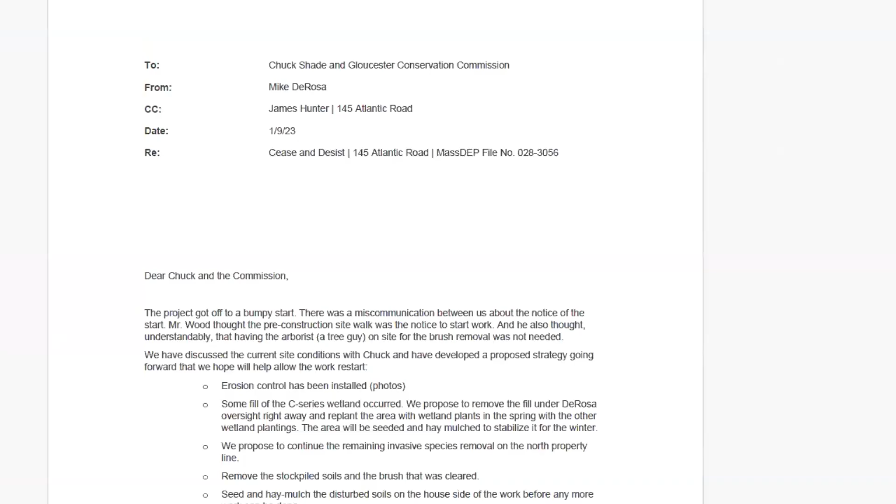Technology is just not going my way. Can everyone see this at this point? Yes, we can see it. Okay.

So we're off to a bumpy start. There was miscommunication or misunderstanding. Mr. Wood thought that the pre-construction site walk was his notice to us that he was going to start soon. It was our understanding, and I think Chuck's understanding, that we were going to get a phone call a couple days before he actually brought machines to the site and did the work. So communication was not 100% there.

And then understandably, he thought the arborist, Mark Cicoria, wasn't needed until the tree work was actually happening, not for the brush removal. So that was his misunderstanding on that. But we've complied with the cease and desist. I've got photos that I can show you, which I'll run through.

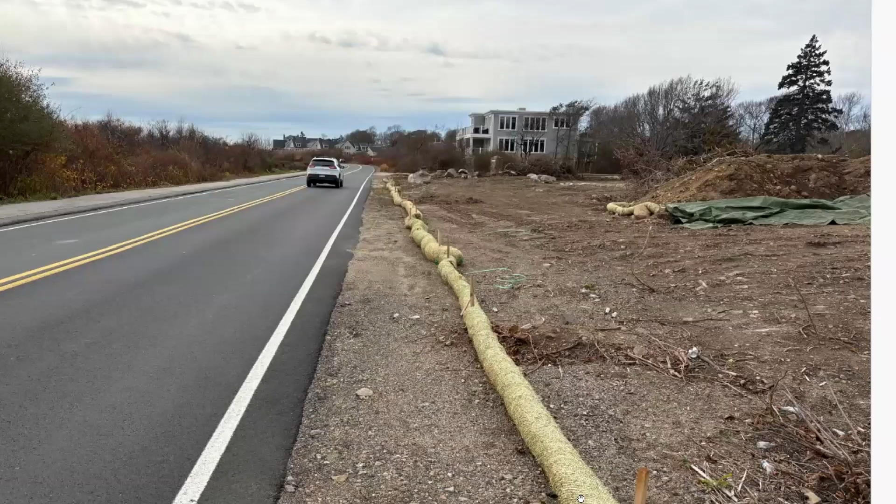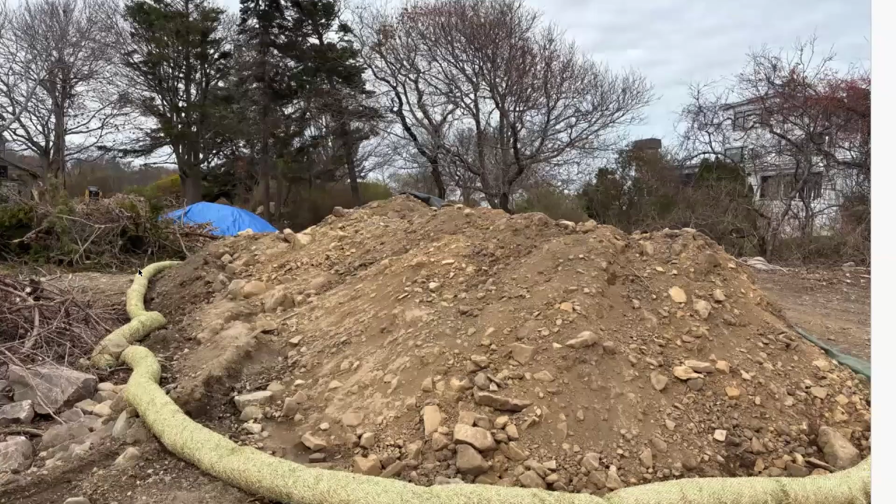These were from today. The erosion control has been extended, so all the disturbed soil has been identified there. It's a flat area, so I'm not too concerned about runoff at this point. They did have erosion control put around the stockpile of soil. This stockpile is proposed to be removed. This was from the grading up near the pool portion of the project. So this is slated to be removed from the site.

And this is the area that Chuck and I are concerned about. This is the area of wetland C. And when the operator was grading out this area, he graded over wetland C. So we've got probably between 4 inches and a foot of fill over wetland C. This is wetland C here. So that photo was looking down from the north towards wetland C, and the grading is right up against the road there.

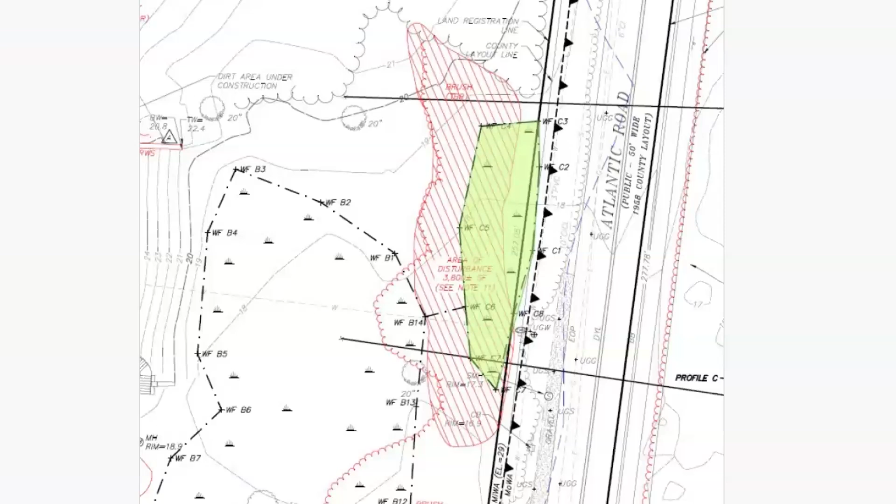So that needs to be taken out. And we'll get to that in a second, but we obviously have to restore that, and we have to restore the connection to wetland B as well. This you can see, this is where wetland C is. This is where the hydraulic connection between the two wetlands is. No real damage at all really to wetland B, so that's good.

They did line up some boulders here. They were not aware of wetland C, so they lined the boulders up around the perimeter of wetland B to protect it. And they were gonna just grade this out and seed it. There is an upland area between the two, and there's a swale that connects these two wetlands, so that needs to all be restored. I don't see any damage from the stones and the boulders being there, but up to the discretion of the commission, they weren't on the plan. So that is an item we should discuss.

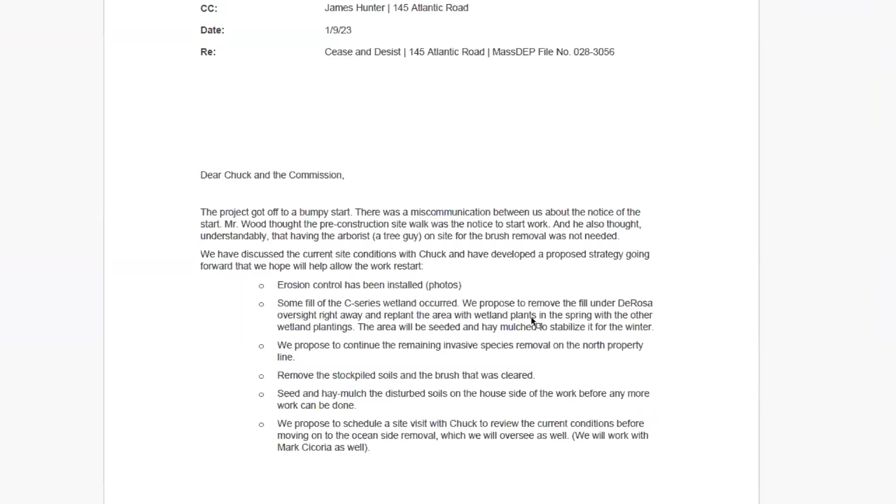There's also some additional invasives, Asiatic bittersweet, privet, Japanese barberry and Japanese knotweed, that all need to continue to be taken out on the north. We have plantings going in here, trees and such. So what I wanted to propose to the commission is that erosion control has been in. We've got to remove the fill in wetland C and reestablish those contours. We'll seed and we'll hay mulch that for the winter and keep it stabilized for the winter.

We'd like to continue with the invasive removal on the north side of that property while the machine is there. We'd like to remove the stockpile and the brush that's on site, that was scheduled to be removed. And then seed and hay mulch all the disturbed soils on the house side of Atlantic Road before we do any more work. Once the north side of the road gets all stabilized, I would propose that we set up a site visit with Chuck to review that, make sure he's happy with that work.

We will do all the oversight along with Mark Cicoria from Cicoria Tree. So we will be very involved from here on out to make sure that things are done right. Mr. Wood knows that, and he knows that we'd be involved. And then once things get all stabilized, we would then ask to go back and continue with the work across the street and continue the removal of the invasives there.

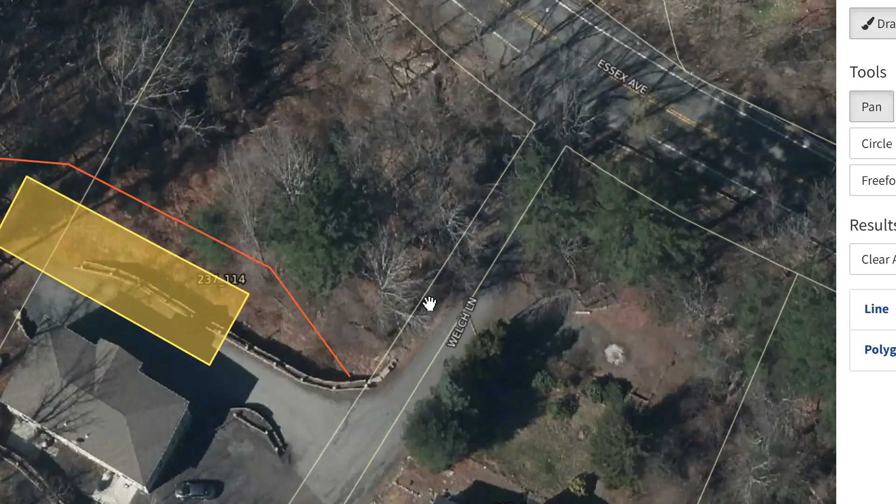And then the other piece of update is that we went and had Bill Manuel, who did the original delineations -- you know, there's an active ORAD on this, but it's active due to extensions granted by this commission and extensions granted by the acts of legislature -- so Weston & Sampson said, although while it's active, we'd like you to please go back and make sure that things haven't changed radically in the 8 years since it was first delineated.

So Bill Manuel went back out there and we'll be submitting, along with the updated plans, a letter from him dated October 31st, in which he points out virtually all the flag boundaries are controlled by either Essex Avenue or occur along the base of the sloping topography. He says, after walking the wetland boundary, I concur the wetland flags remain accurate to define the wetland resource area.

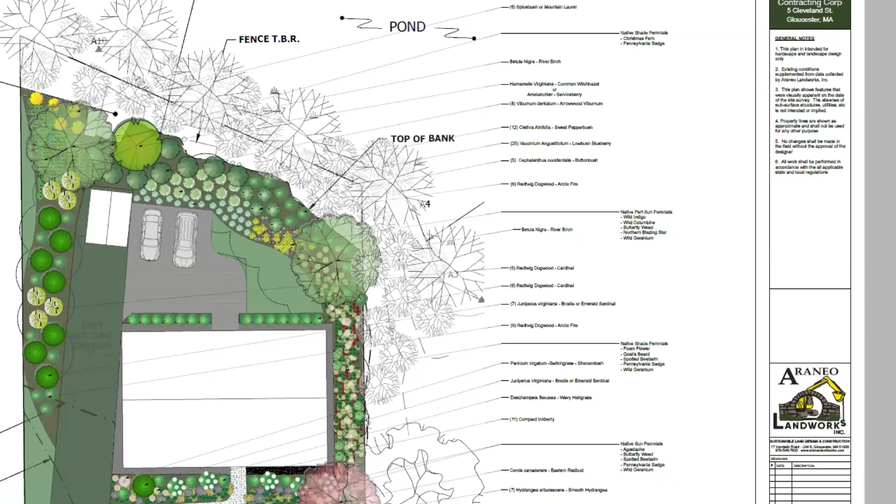Thank you, Chuck. So you're referring to this area back here? Yeah, right. We don't have anything specifically proposed there because we had enough planting to accommodate the required amount in this area, but there's no harm—we're going to be removing this, and there's asphalt here and here, so you're right, this does need to be planted.

So perhaps, if the commission's comfortable, as a condition of the order, the area toward the northern part of the lot where the asphalt's removed needs to be planted with native species as well. I think we'd be fine with that. It would be great.

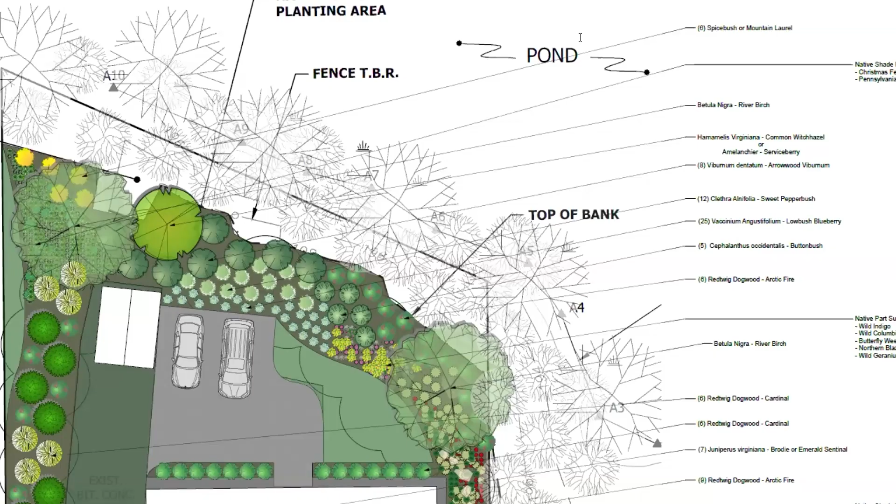Commissioner Chuck, did you have any additional comments? No, I think that's good because that's also kind of a steep slope beyond that, so it'd be good to have that stabilized. Commissioner Jackson moves to close the public hearing for NOI 0823094 at 11 Apple Street.

Commissioner Cook seconds. Member Cook, yes. Sergeant, yes. Member Terry, yes. And Member Jackson, yes. Commissioner Jackson moves to approve NOI

020823094 at 11 Apple Street with the aforementioned condition. Commissioner Cook seconds. Member Cook, yes. Yes. Member Terry, yes. And Member Jackson, yes. Wonderful. Commissioners, thanks for your time tonight. Thank you.

On the next item, NOI 0283095 at 6 Brewster's Lane and 13 High Rock Terrace, Lisa Latoff Perlo, the applicant. This is to raise and rebuild a dwelling in regards to the Coastal Bank.

John Judd from Gateway Consultants, representing. Thank you, Mr. Chairman, members of the commission. For the record, John Judd, engineer with Gateway Consultants, representing the applicant for this property.

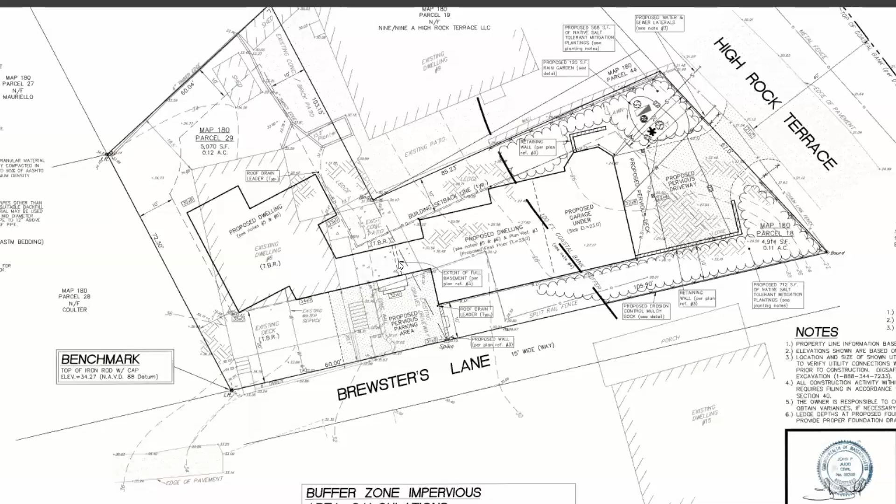What I can do is share my drawing showing the latest site plan that was submitted. At our last hearing, there were some questions regarding the area of the rain garden and the soil conditions there. We subsequently went out and did a soil test pit, got down to over 40 inches deep, showing the test pit log—there was pretty good sandy material there.

There was also some reduction in the footprint that the architect gave us, so that's been incorporated into what you see here. There is a pervious driveway proposed coming off here, but we are providing the requisite mitigation planting for the buffer zone.

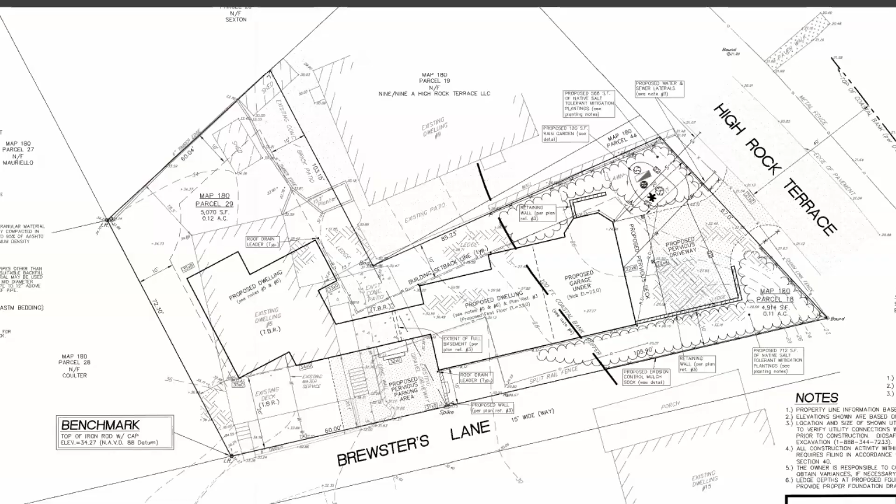Those calculations are shown here. We're doing 200% of the 640 square feet in the buffer zone of the proposed impervious area here. So this is all proposed to be native mitigation planting here. There is outcropping of ledge here.

And at the last hearing, there was some back and forth as far as ledge removal. I'm confident that ledge removal is going to be needed. However, the applicant has indicated they're using a new technology, the Dexpan expanding grout, which eliminates the need for any blasting. So we accept a condition for no blasting on the property.

And what they do is they drill these holes closer together and they put it in with this expanding grout, Dexpan. And apparently it's been used extensively in other communities where blasting is just not possible. So I'm curious to see how that works, but they've accepted that should the commission decide to prohibit any kind of blasting, they'll accept that condition.

Again, we're in a buffer zone notice of intent here, and we are providing 200% mitigation planting, and we did add the test pit for the rain garden. Obviously, everything gets approved through the city engineer during the building permit process for drainage. So I can answer any questions you might have at this time.

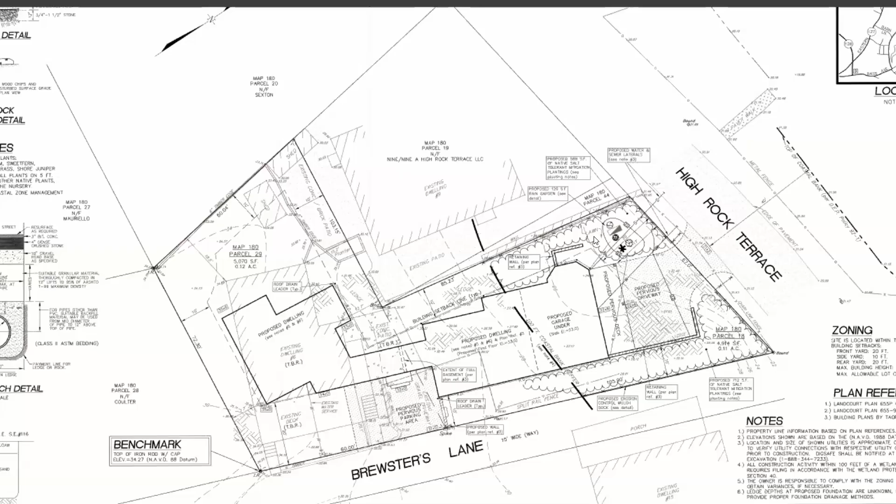Thank you. We'll open up to public comment. Any members of the public who wish to comment on this project, please raise your hand. We have one hand up on the Zoom, Sean McCormick.

Thank you. Good evening. It's Sean McCormick of Davis, Malm & D'Agostine. I am here representing the abutters on basically either side. It's 9 High Rock, 9A High Rock, and 15 High Rock.

But I guess my first question is really the resource area here is bank, and I've been through the filings so far, and I'm just sort of struggling to understand how we can evaluate the increased impervious area that's going to flow towards the bank, and I'm not seeing anything akin to a stormwater report or any kind of stormwater numbers or drainage calculations. And so, I think my clients are justifiably concerned about the health of the bank that either abuts their property or that comprises a portion of their property.

Well, I'll share. Let's see, this one. Share. Can you see it or can you see my whole screen? This is it, I guess. There we go. Yes, can you see it? I can't see what you can see, unfortunately. Okay. Yeah, we see it. So underneath my plan is the original approved plan.

And what happened on this site is that because that driveway was very, very steep going straight up, if you can see the gray underneath, it was decided to make it a little safer and to realign it and to curve it so that it's not such a steep, crazy slope going up. And that's one thing that happened. And then also to support some of the grading, there's a boulder wall down along the street line.

The very first thing is the proposed planting on the approved plan called for something like 74 2-inch caliper trees, and there's absolutely no way. I don't know how you could put those on that amount of space within this, which represents the jurisdictional area, the 200-foot riverfront zone. And so they asked me to come up with another plan that is more feasible.

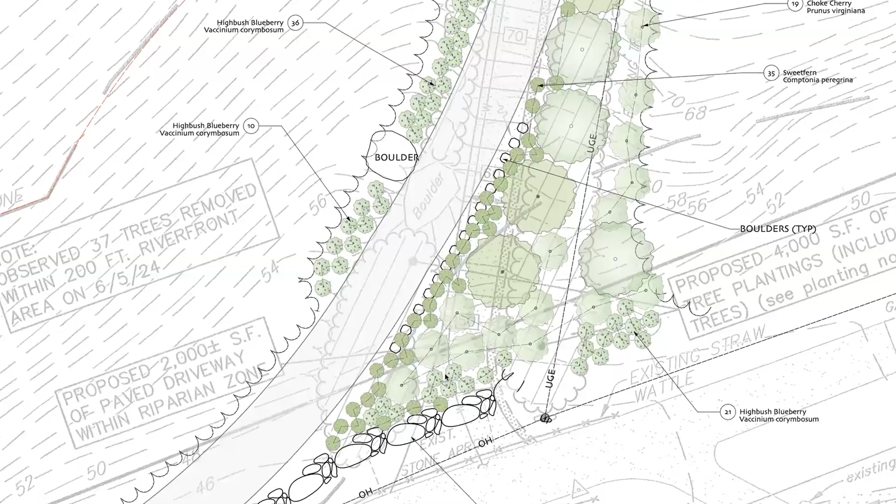The other thing I forgot to mention is that there is an overhead wire along the street down here. And so I was trying to keep tall plantings away from that overhead wire so that didn't create problems down the road. And there's also a power line that connects from this utility pole here up to a well, that's the location of the well where it was as built. So, do you have questions?

Okay, thank you. We're gonna open it up to public comments now. Any members of the public who wish to comment on this project, please raise your hands. We have no hands up on the Zoom and none here in person. And just to remind the commissioners, this is not an NOI hearing. This is to determine if the commission's okay with this planting plan under the current order of conditions, or if they feel there should be an amendment or some other plan to go forward with this.

Okay, we'll do commissioner comments now. We'll go through all the commissioners and then you will have a chance to respond. Member Cook, you're muted. Yeah, and I know you said it's not part of the NOI, but I think they go hand in hand here. The plan from March 27th, I believe it is, we show a deep swale over on the side to capture rainwater and all of that. I almost think we need to go back and approve the road changes that go into some of the resource area, and then go back and look at the plan for the plantings.

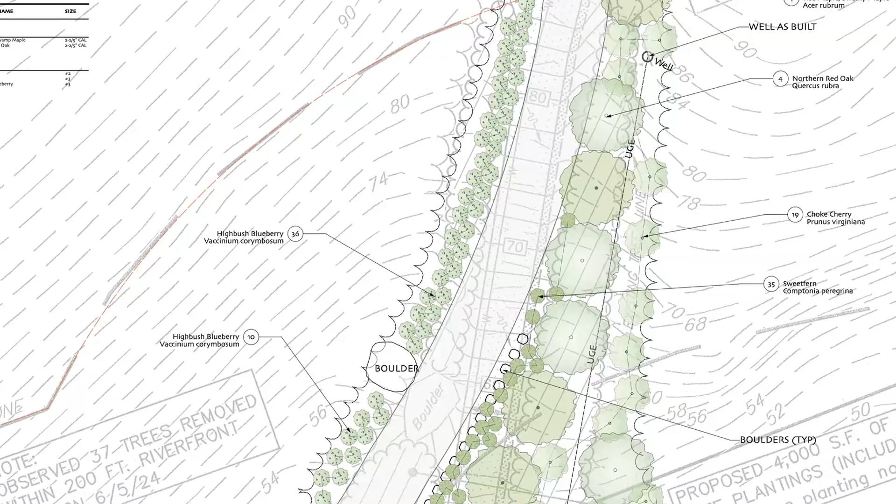Okay. Do we have any other information we need from her, or do we just need to figure it out? I think it still needs to be an amendment. If you can show that. Do we want to take a vote? I'm doing an amendment. I'd like to hear if Chuck has any additional comments. Yeah, Chuck, any comments?

Yeah, I mean, I understand the concern with the discrepancy of 74 trees, now 8. But I also understand the constraints there. I do think there is value in planting other strata of vegetation out there rather than just trees, as was originally proposed on the order of conditions. So maybe there's a happy medium of additional trees, but also having these other strata in there.

I think some of the concern too, typically the 2-to-1 is assuming that all those trees, though they might make it the first 2 years, they're not going to make it to maturity. And I think the current proposed plan is assuming all those trees are going to make it to maturity and fill out. So maybe with that understanding, there can be additional trees planted so that when it achieves maturity, you have that canopy cover. But it sounds like there's interest in having this come back as an amendment.

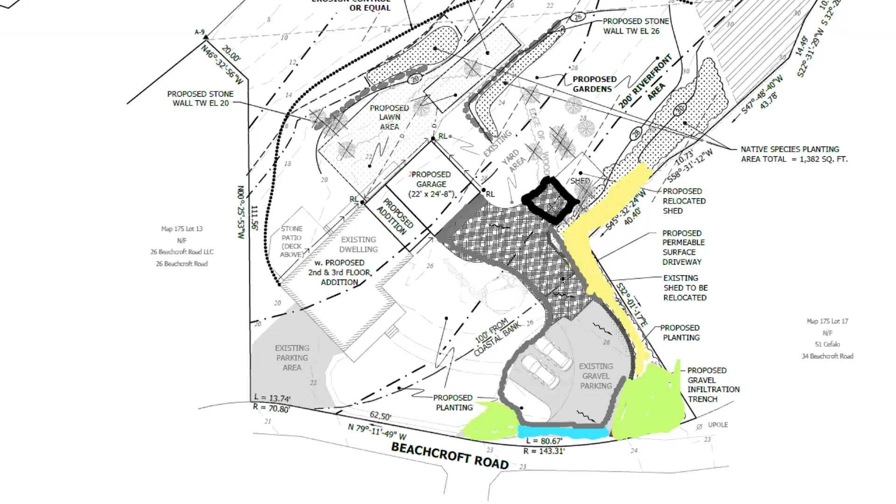And the intent is to capture water from the driveway? Yes. It's that dark gray line that's the infiltration, on the edge of that pavement. That's still gonna be done? Yes. Okay.

Okay, and Member Jackson, you've had this project come in before with an NOI, which has gone forward. I guess I also support the project.

I guess my only question is, all of the planting you're doing, is some of it in addition to what the previous NOI requested, so that you're mitigating for the new impervious surface? We haven't stated that, but we will be putting a lot of plants on the property. Even though we're planting the additional trees and shrubbery as requested, we intend to add more plants throughout the property, more so for pollinating and for the wildlife around there. I'd like to see more of that.

You're good with this, Chuck? Yeah, it's actually a decrease in the overall footprint because they're moving that shed. Okay, so the footprint of the disturbance was already approved. By moving that shed to where the blue square is now, they're decreasing the overall footprint of that driveway. It's just a matter of making it impervious versus pervious. I think as long as it's capturing that runoff adequately, I'm good with it.

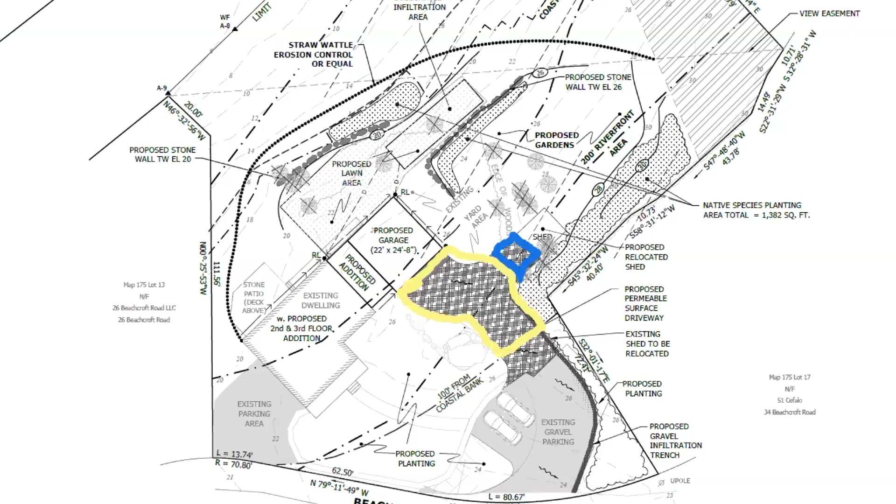Commissioner Jackson moves to close the public hearing for NOI 0283002 -- no, and Commissioner Jackson moves to close the public hearing for RDA 1839 at 28 Beechcroft Road.

Commissioner Cook seconds. Roll call: Member Cook, yes. Sargent, yes. Member Terry, yes. Member Jackson, yes. Commissioner Jackson moves for a negative determination for RDA 1839 at 28 Beachcroft Road, as described.

Commissioner Cook seconds. Roll call: Member Cook, yes. Member Terry, yes. Member Jackson, yes. Okay, thank you very much.

Thank you. Good luck. Thank you.

Okay, moving to the next item of new business: NOI 0283098 at 50 Essex Avenue, City of Gloucester DPW is the applicant. This is for the addition of a secondary treatment system to the existing water pollution control facility, within the flowage and buffer zone areas.

Lisa Gloucester from Tetra Tech -- yeah, I might start off. Good evening, members of the commission, my name is Bob Parsons, I'm a project manager at Tetra Tech. I'm joined by Tom Keefe, who's a design manager at Tetra Tech. We also have Lisa and Sean Foster from Tetra Tech presenting virtually. We wanted to be here just in case, and we brought some plans as well, easier for the members to see. Eric Kelly is also attending virtually from Apex Companies -- there's a lot of history on this site, so we have the right folks on. I believe Siobhan Callahan may also be virtually present; she's an engineer with the City of Gloucester. Is Siobhan on here yet? Maybe Dana -- is Dana on there by chance? Okay, she is.

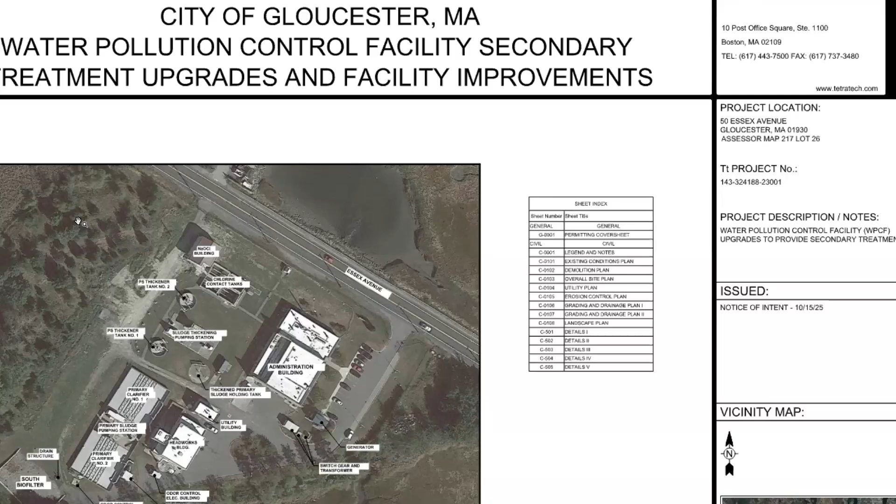What's interesting is when we were doing research for this project, looking at permits filed back in the 70s when the original plant was constructed and permitted, the secondary treatment was actually shown on this portion of the site. So it appears it was always intended for the site to have a full build-out with secondary treatment.

So we zoom in a little bit here to an aerial photo. The red represents the entire parcel that the city owns. The blue color represents the flood barrier berm that was constructed. So all the work will be taking place within the flood barrier wall and berm.

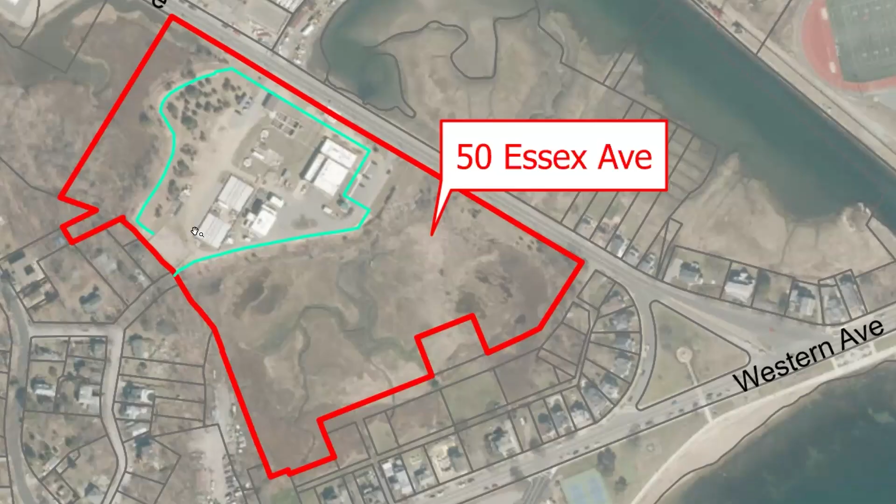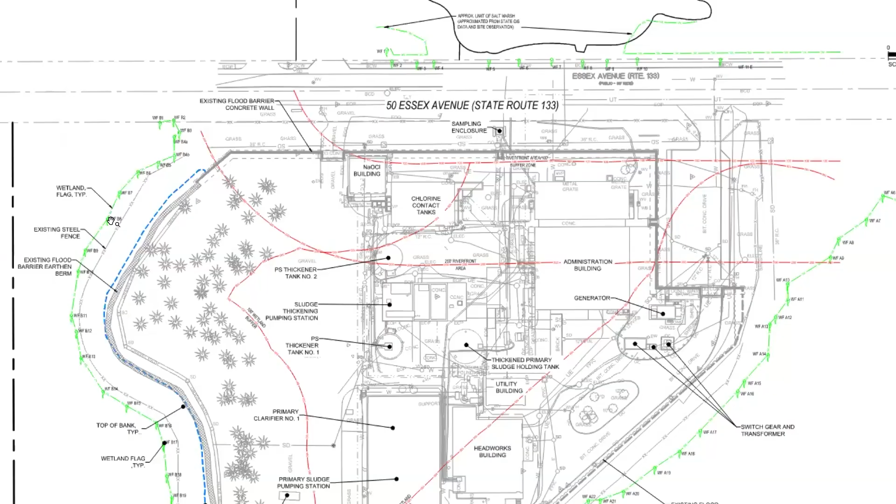So if we go to the existing conditions plan for a second, we have wetlands exterior to the flood berm and flood wall on either side, on the east and west sides. We also have wetlands across Essex Avenue. So we have a 100-foot buffer zone from each of those series of wetlands cast onto the project site. This is the wetland limit in green, and here's the buffer zone all the way around to here.

What I'll point out is there is a perennial tributary across Essex associated with the Annisquam that does project a 200-foot riverfront area onto the site. However, there are provisions in the Wetlands Protection Act that for sewer treatment facilities and plants, expansions or new, the performance standards for riverfront area don't have to be abided by. Those are relaxed.

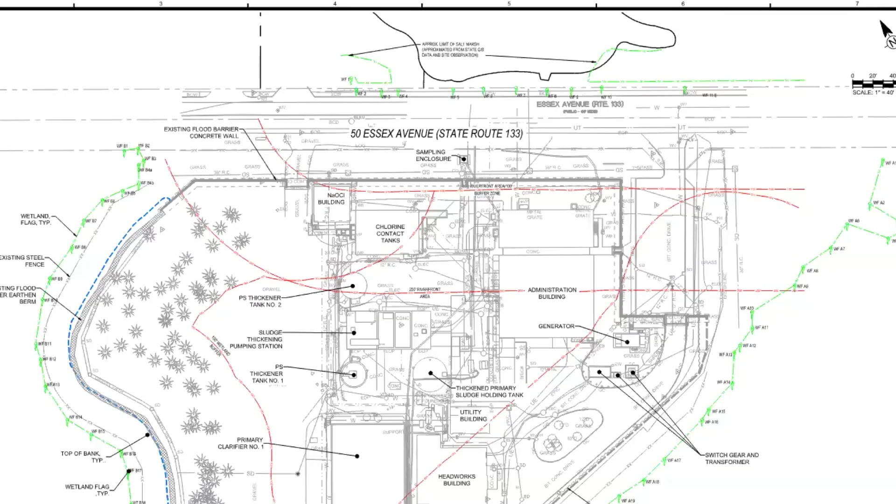So if we look at the site, we also have a number of trees that you saw in the aerial photo. We did a tree inventory, and there are approximately 33 trees that will have to be removed in that area to facilitate construction.

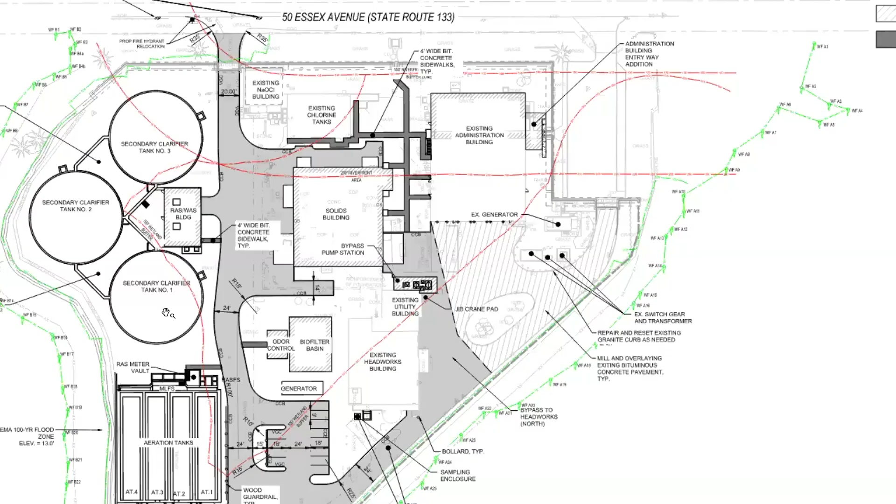So if we look at this site layout, I can tell you it's extremely tight. Almost every square foot of this site is going to be occupied by a project component. So we have these clarifier tanks, and just to give you a scale for an order of magnitude, these are 90 feet in diameter each. These are very large tanks. We also have aeration tanks in the buffer zone, and a building.

We'll be improving the emergency access in the back. We have additional parking spaces, and the gray represents the addition of pavement. Right now, the majority of this is gravel, and that will tie into the existing pavement that's there today.

So two things I want to mention. One is we recognize that trees are part of your ordinance. We'll be removing 33 trees, and we were hoping to have a meaningful location for where to put those trees, because there's no space on this project site. There's really no room to put them. So we were hoping to work with the commission and perhaps the tree warden to come up with a meaningful location, maybe somewhere else in the city that the commission owns a property or owns a park that they want to see enhanced. But we're really pressed for space on this site for the trees.

And we would respectfully request a condition that we appear before you with a tree replacement plan for review and approval prior to the issuance of the certificate of compliance.

The other component, an administrative ask if you will, is the construction is expected to start in 2026 and will go on for between 4 and 5 years. So there is a provision in the Wetlands Protection Act that allows the commission to issue a 5-year order, and we would respectfully request that you entertain that request of a 5-year order.

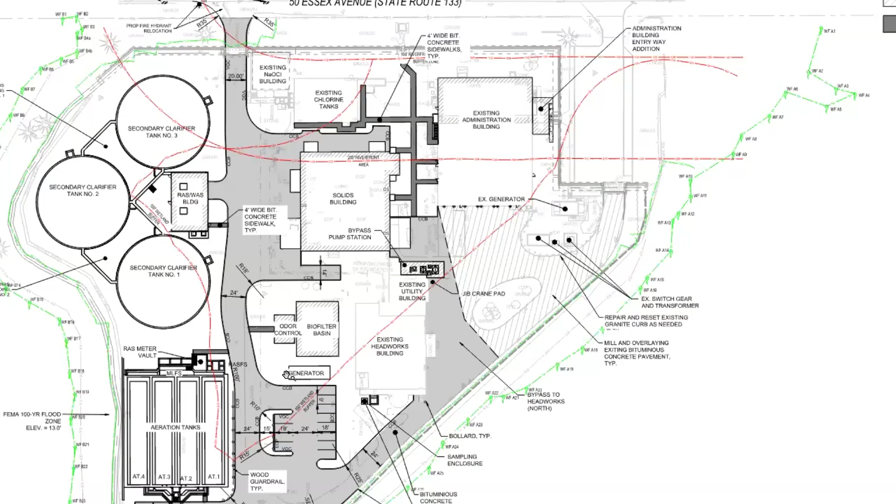As part of the previous flood mitigation project, there was an emergency access way installed on the south side of the project facility. We're proposing to install pervious pavers to connect the paved driveway to that emergency access. The existing access, which is primarily gravel, we're going to maintain as is, size and slope, but we are proposing some stabilization measures to add to the steeper portion of the slope.

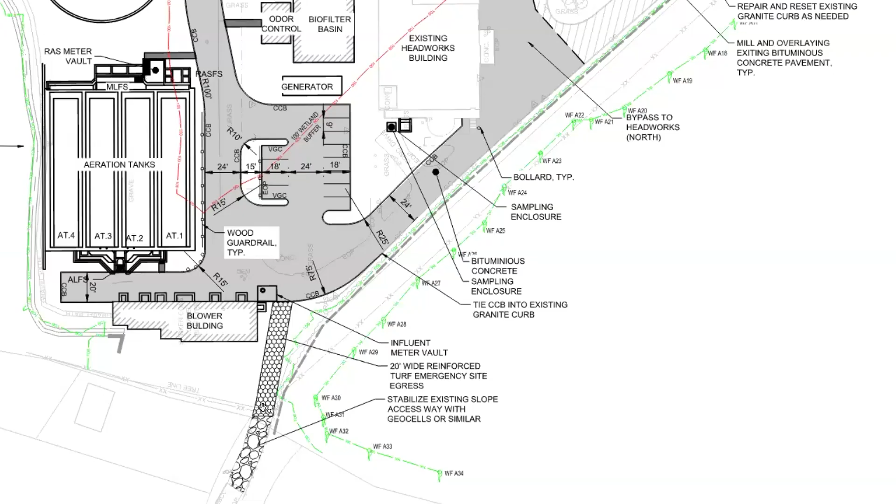The existing site is fairly flat, generally 1 to 2% slopes. Aside from the deep excavations required for the structure foundations, some site grading will be required for stormwater management purposes. In regards to stormwater management, the project has been designed in accordance with the Mass DEP Stormwater Handbook. It is considered a new development because we are increasing impervious area.

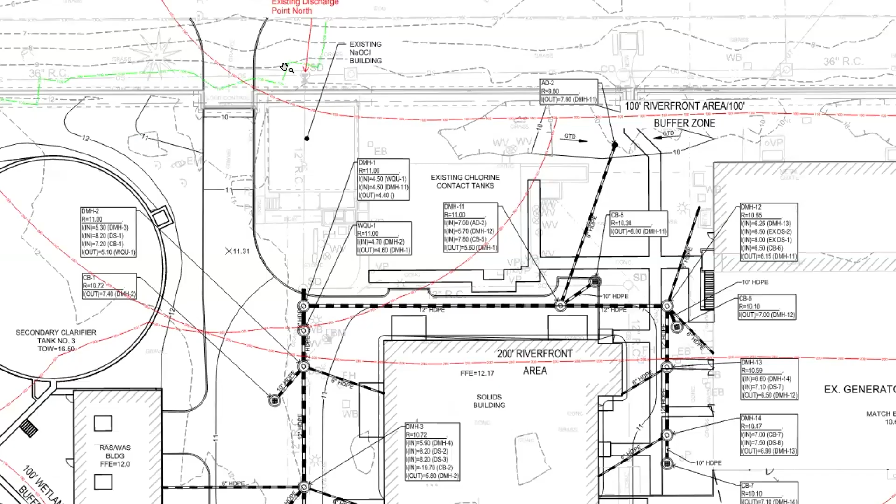Currently, the site has 3 existing stormwater discharges from the project area: one to the north, one to the east, and then one to the southwest.

We're not proposing any new discharges. We're not even going to modify or upsize what these are. We're just going to connect to them and utilize them as they are today.

Our geotechnical subconsultant did a pretty rigorous subsurface investigation, which included test pits, borings, monitoring wells, and infiltration testing. Based on those results, it's mostly a fill condition, and the soil hydrologic group is a C, with seasonal high groundwater around 3 to 5 feet below ground surface.

Depending on where you are on the site, due to the nature of the facility operations, numerous subsurface proposed utilities, and the somewhat high groundwater and soil conditions, infiltration or recharge is only provided to the maximum extent practicable. That is allowed for C soils under the Stormwater Handbook.

For water quality, primarily paved areas and other impervious areas will be captured by catch basins with deep sumps and then directed through a particle separator to provide 80% TSS removal.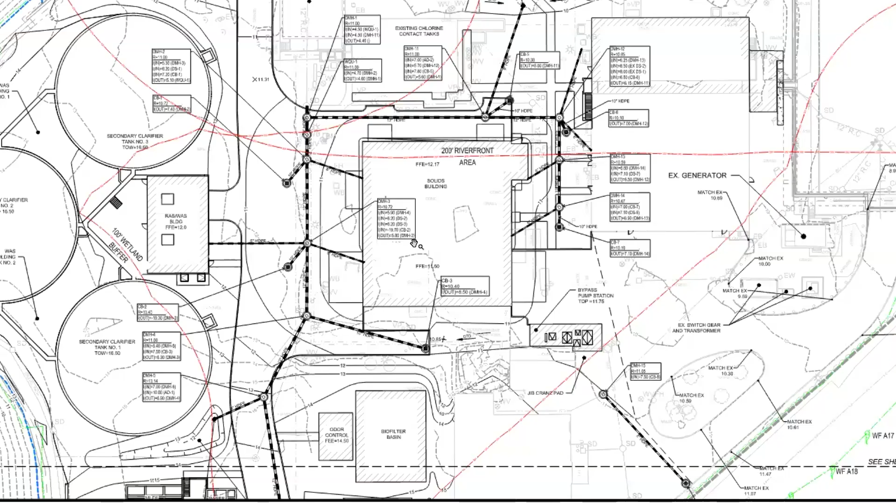One little tidbit to this project is the existing headworks building receives offsite wastewater from offsite septic haulers, and they connect to discharge their load into the treatment train.

These pollutants are discharged directly into the process, but there's a remote chance that some of those pollutants could come in contact with stormwater flow from a rainfall event. Any area where they're loading or unloading is going to be completely segregated from the stormwater flow.

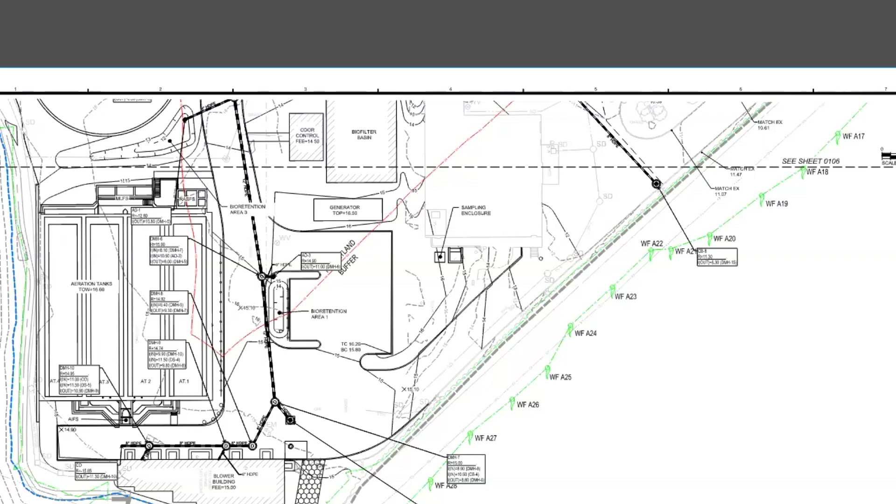What I mean by that is it will be graded and captured by its own catch basin and directed back into the pumping system to be collected and treated as part of wastewater. Again, just a mitigation measure to eliminate any chance of that happening.

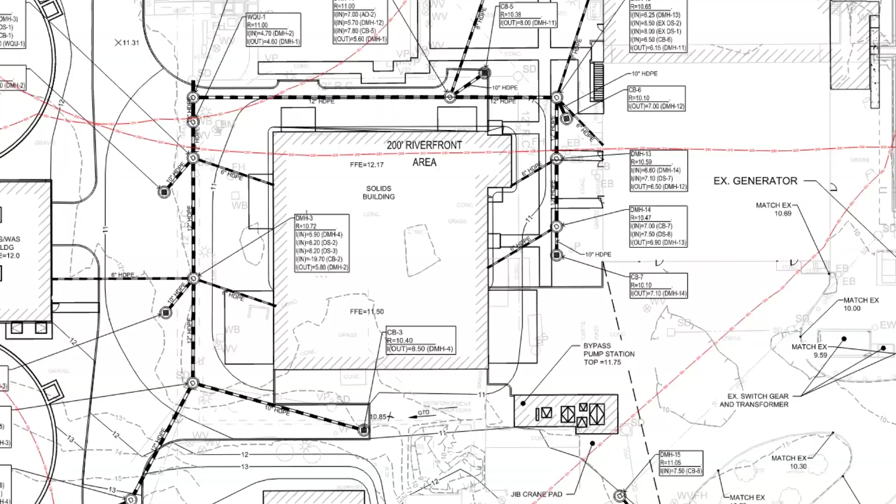That kind of wraps up my piece of the presentation. I'll turn it over to the commission if they have any questions or would like to discuss anything more.

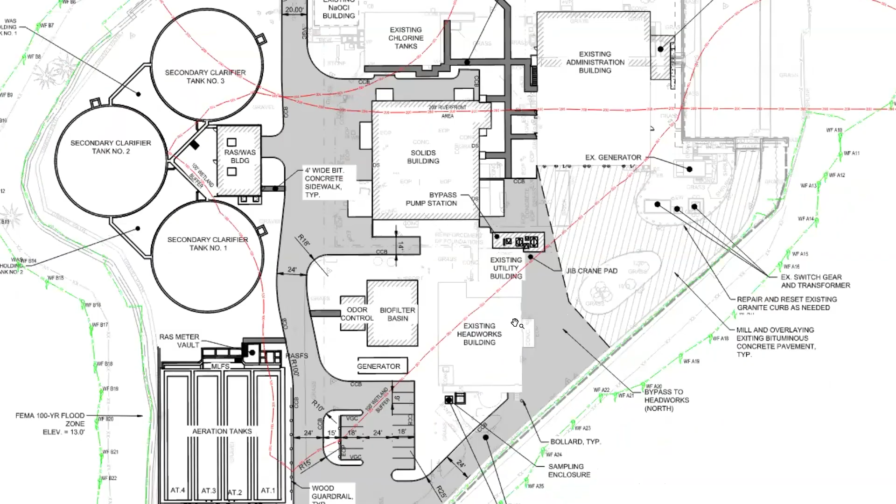The second question was in regards to the septic deliveries, right? So right now the Headworks building, and Lisa, I don't know if you could bring that up again. They deliver on the east side of the facility, and they just have usually a hose that connects to the back of the truck, and that kind of dumps right into the treatment system. The situation that could happen is that that whole area where the truck is is kind of open air, right? And kind of exposed to rainfall.

So in the incidental chance that there's an accident or something that happens during this process, whether the hose is leaking or there's some incidental spillage from the hose, any rainfall or anything that falls in that area would be collected into a typical catch basin and directed into the system. So I don't think it happens all the time, but it's a situation that could happen. It's not a planned occurrence. I think it's a belt and suspenders. Yeah, exactly. Normal situations, they connect, all the flow goes through. Right. In a rare event, a gallon or two left in the hose spills on the ground.

That's going to be captured now better than it is presently being captured. Okay. There's a contained catch basin system where it goes. Yes. It will not be discharging to any receiving waters. There's treatment on that specific part of the catch basin; that stormwater system has treatment. That one catch basin goes back to the head of the plant and will flow through the treatment plant. That's not being discharged through those three locations he pointed out. Okay, thank you.

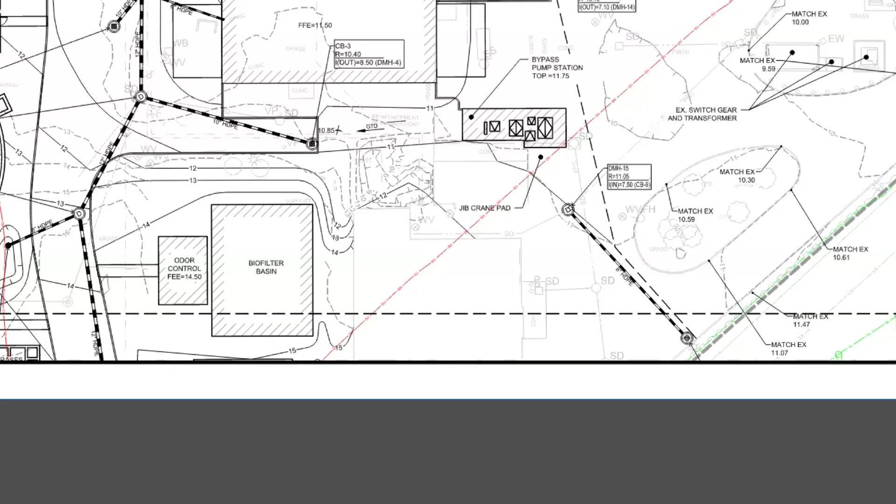Okay, is that all of our outstanding questions? So, just in terms of process, it sounds like the planting plan is really the one large issue that you want to resolve before moving forward. Just in terms of framework for that plan, so we know we're moving in the right direction, is there any guidance that you can provide, or do you want to leave it up to us to come up with some? Because the site is constrained, I just don't want to fall short on something. And that's why we looked at offsite type mitigation. Generally, offsite is when you can't do it on site. Right. And there's some area where I think there's some invasive species on site that can be taken as a credit.

And if you can look on site anywhere within the lot lines, do that first. That's preferable. And it doesn't have to be trees, as you heard; it could be shrubs, smaller ground cover, and people have mentioned already that there's a preference for pollinators and things like that. That can be taken into consideration too. And if there's any opportunity for wetland restoration, even if it's in a resource area, that's appreciated. And there may even be some grants for some of the wetland restoration. I know in the past there was. I was heavily involved in it.

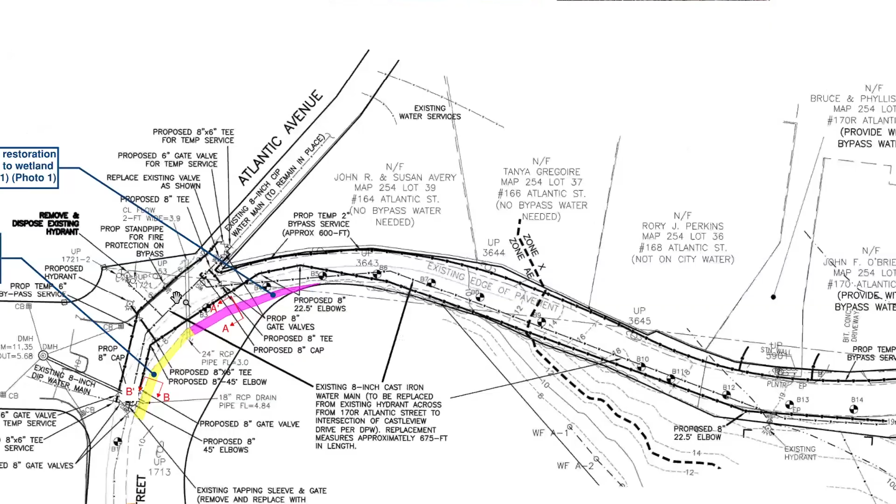I know it's late. I do have the original kind of mitigation plan and some photos if you'd like a quick refresher on where this is. I can pull up my screen. So this is at the corner of Atlantic Street where it splits with Atlantic Ave at Castleview Drive. And it was May 2023 actually when the work was underway, and a portion of this culvert, when they were excavating for the water main, collapsed.

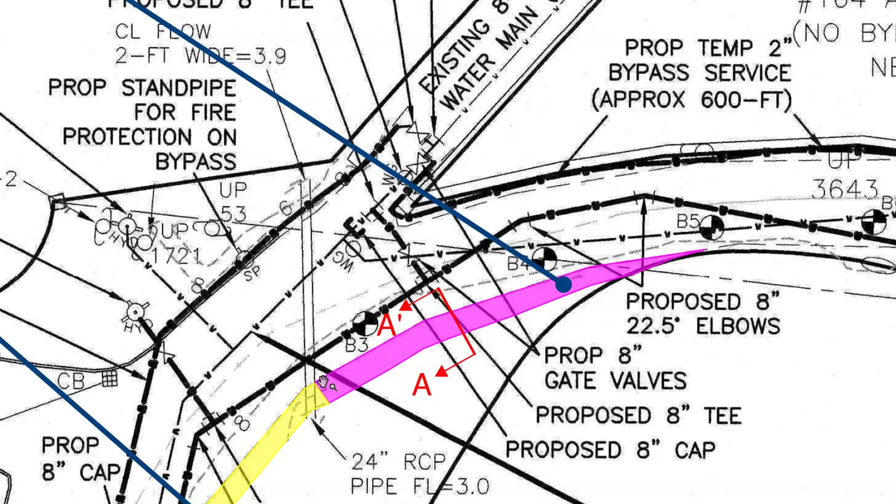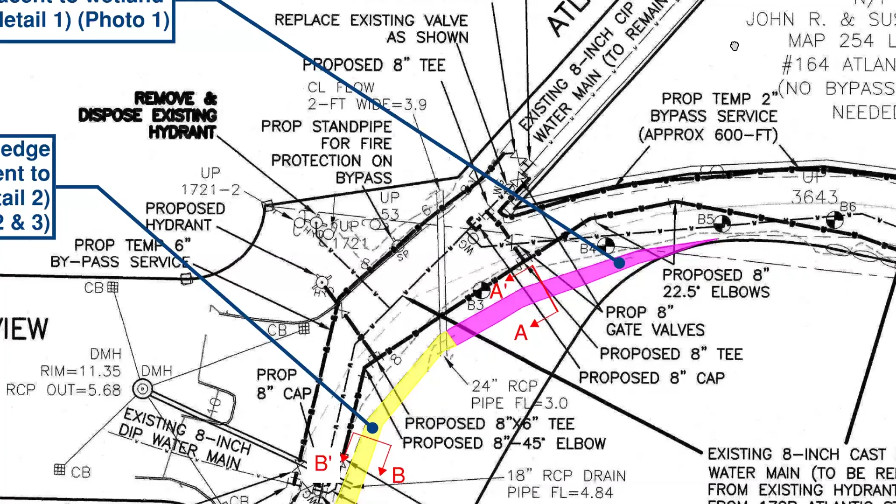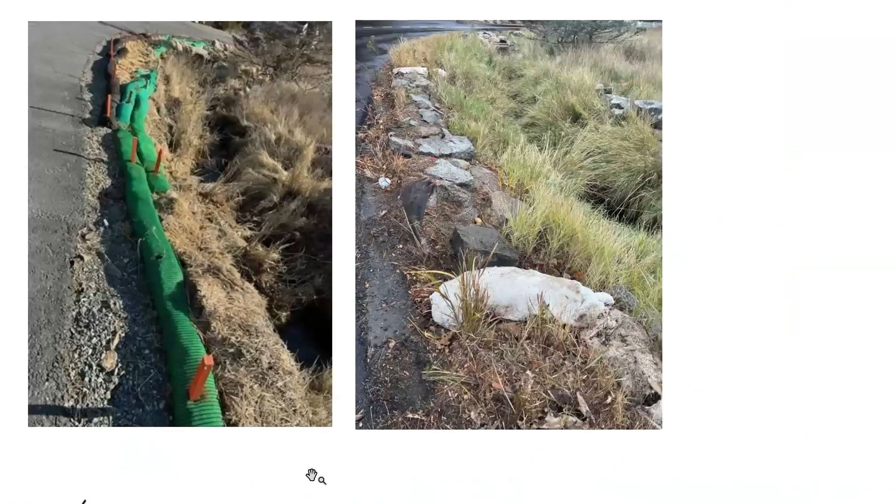There was some resulting miscommunications, if you will, with the construction team that was doing the work. The enforcement order was issued on June 8th of 2023. I got involved shortly after that. And at the time I got involved, they had already done quite a bit of stabilization and brought it down, but we had a series of meetings on site with Chuck, with your commission, although I don't think everybody was here for all of these, but kind of the condition when we started conversations after the work was done is in this picture on the left.

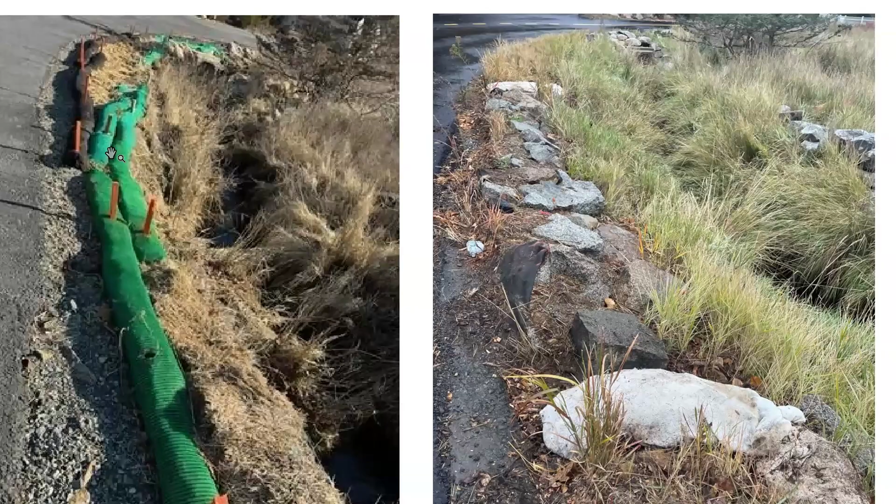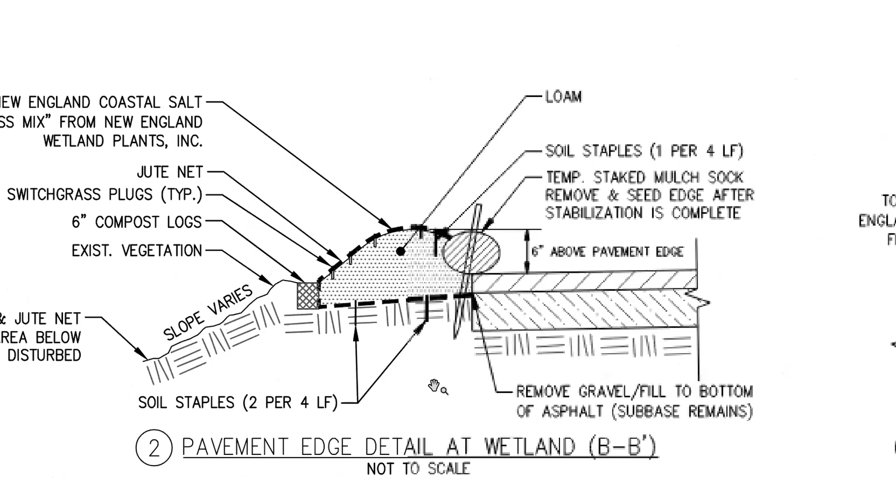They had put some silt socks, mulch socks up. Some restoration work had occurred. We took it another whole step, and we designed some shoulder reinforcements out of some of the native field stone that is present there, as well as some blast rock that we took from the nearby construction site, stabilizations with wattles and jute wattles and things of that nature. And as of last week, this is a picture of what it looks like today.

There were, in addition to seeding, netting, stone reinforcement, they also put in a lot of plugs at this time. You can see just how the plugs and the grass and everything came up through all the stone and really took well in this area. Chuck can speak to it from his perspective as well. You can kind of see in the background of this picture the culvert here, where we did place stone above this to protect it as well. This is a new section of culvert that was put in, and then it continues on around the corner. So in total, it looks very stable.

Procopio did replace a compostable mulch sock for a section right here. This is the one that was just before they replaced it. And in addition to this, there was a settlement with a financial contribution made for eventual replacement of the culvert, which the DPW, the city would undertake. So those funds would go towards that. And in addition, what you won't see in the photos, but I can say this because I was out there actually doing this work myself with the construction team.